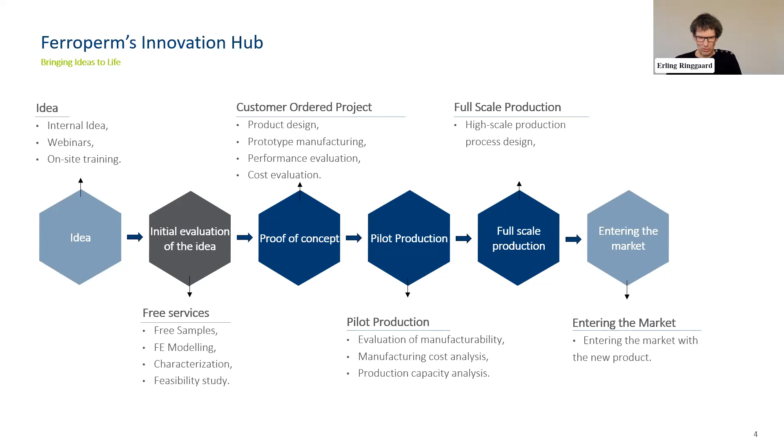Do you mind to share my screen? Yes, I'll just. So I think I will stop sharing now. Yeah. So, and I think you can.

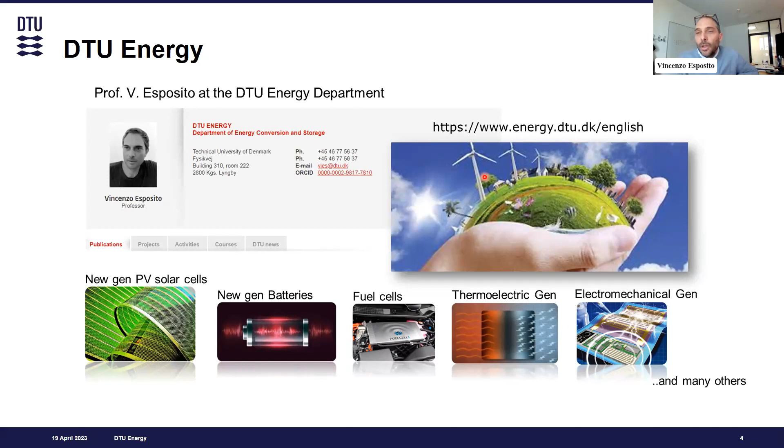This is especially related to the first part of my presentation, which is about a new class of electromechanical active material that are oxygen-defective oxides. In this part, I will show you how these materials that have been used for many years as ionic conductors have actually very interesting electromechanical properties at room temperature.

In the second part, I will give you a little bit of seminal work that we have been conducting in the last years to make some new electromechanical systems in the macro scale. And especially our focus is on additive manufacturing of ferroelectrics and piezoelectrics more in general.

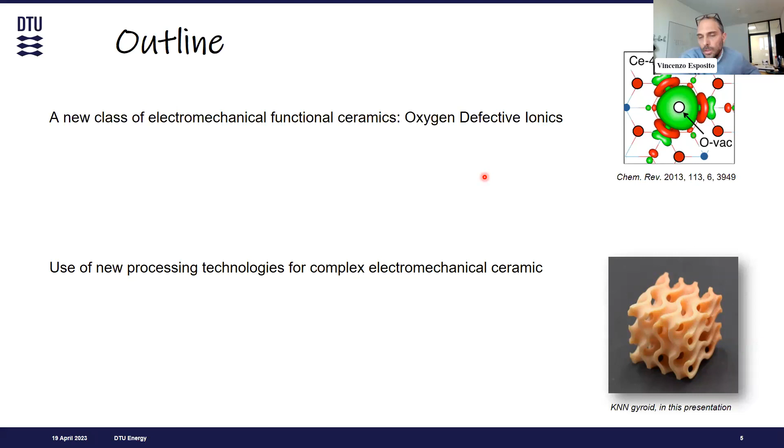So let's start with the first part, which is about oxygen-defective metal oxides. These materials are metal oxides, so ceramics, and they are centrosymmetric. So first of all, we break the first law of piezoelectricity. So we don't expect to have any or very small electromechanical activity out of this. But they have a very special feature. They are missing some of the very important constitutive part, which is the oxygen part.

So somehow, if you think of a material as a structure that has several structural components, we are missing one of the pillars locally, of course, and this is creating in the material some kind of effects that can activate and trigger electromechanical response. This has been shown not by us, but some time ago already in 2012 by Professor Lubomirsky from the Weizmann Institute of Science.

And he has demonstrated this principle in cerium oxide, which is one of the defective materials with a fluorite symmetry, and where in a thin film shape under a pretty low electrical signal, you can actually have some actuation, very important actuation, actually pretty large.

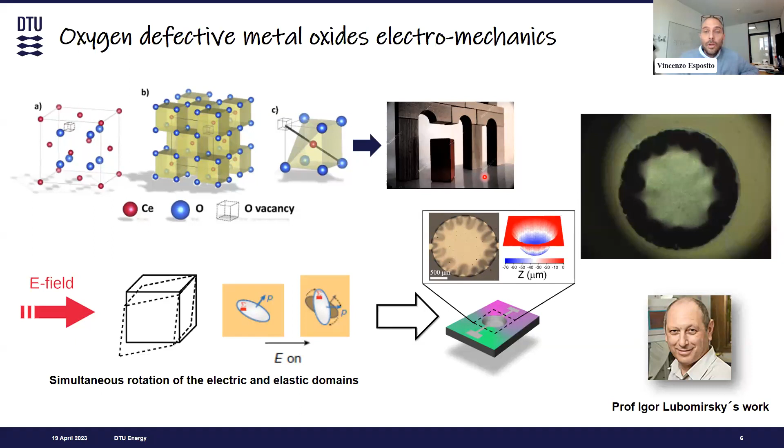So again, we knew these materials as oxygen ion conductors, and this is where they have been applied for sensors and fuel cells and electrolysis at high temperature. This is because those defects at high temperature are actually mobile, and we can transport oxygen vacancies through the structure just applying an electric field.

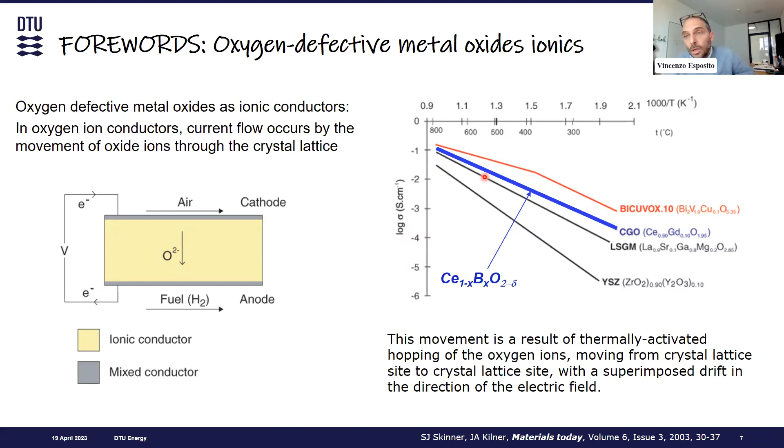If you look a little closer at the structural level, you will see that the oxygen ion transport occurs because there is some exchange in the site position of the oxygen vacancies. And this can happen through different paths, with different activation energy. But the most important condition is that we have enough thermal energy to activate this process.

So together with the application of electric field, we can move these vacancies, or if you look at it from the other side, we can move oxygen from its position to the vacancy place. So we have this transport effect at high temperature. And of course, this transport effect depends on many things.

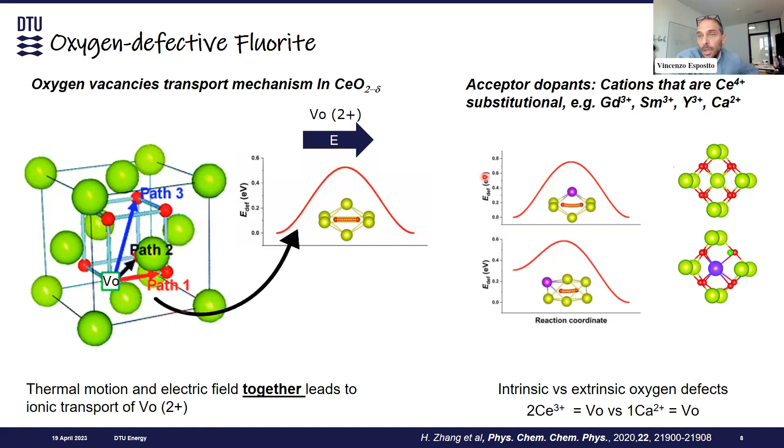And one of the important parameters that we are considering is the local distortion, for example, which is due to the dopants that we are using in the material. The dopants here are usually elements that have a lower valency, so they actually can induce formation of vacancies, but at the same time, they induce some electrostatic distortion of the lattice. And this can change the ionic conductivity.

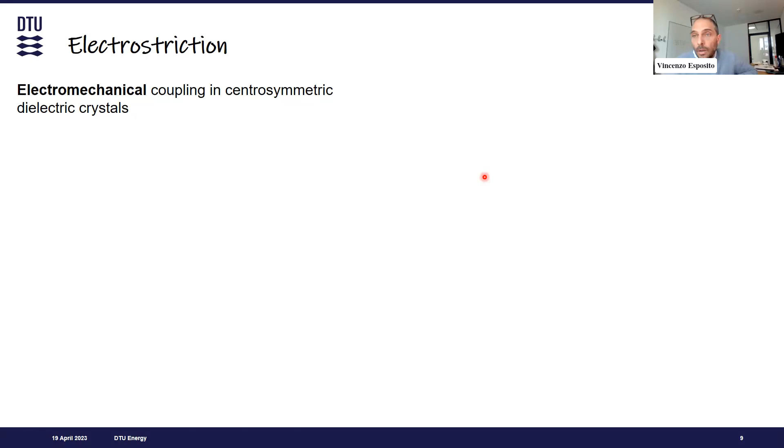So if we want to go back to our defective metal oxides as electromechanical functional materials, we will see that they have a response which is typical of electrostrictors. And here I want to open a very tiny parenthesis on what is electrostriction. Electrostriction is a common phenomenon for all insulating materials that under an electric field basically give a separation of charges. This separation, of course, leads to actuation or change of shape or strain in the lattice.

So we have here already a difference between electrostriction in centrosymmetric material and electrostriction in piezoelectrics. In this case, it is just actuation. So we give an electrical signal, and what we get out in the material is a strain. We cannot, unfortunately, get the other function typical of piezoelectrics, so the direct piezoelectric properties, where applying a strain, we get some electrical current.

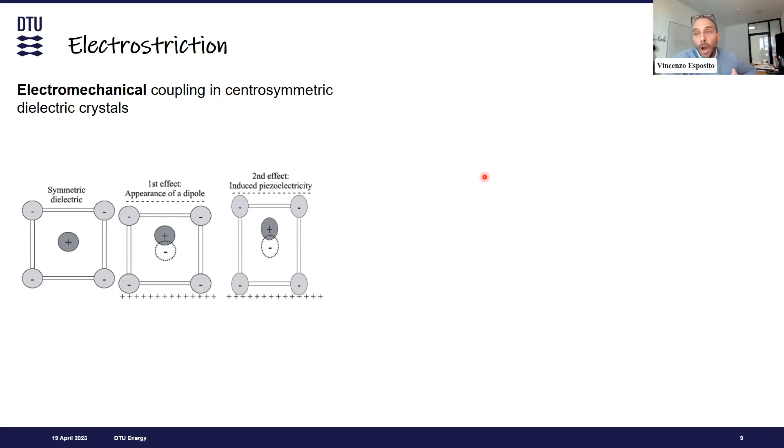However, the electrostriction itself is pretty large. Another difference with piezoelectricity is that electrostriction goes with the quadratic law. That means that it follows this parabola, and the signal is always positive, exactly because it's a quadratic law.

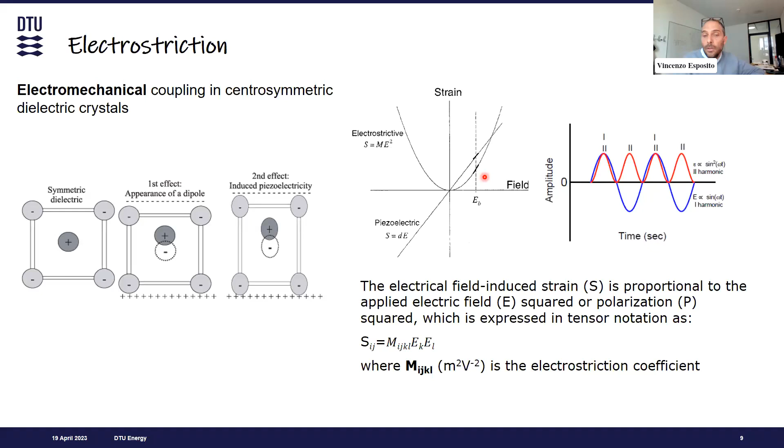And there are, of course, some equations that describe this effect. These are schematically represented in this slide. So, electrostrictors are very interesting materials, electromechanically active materials, because they give a very nice, precise actuation. They don't depole, they have nice features, and they can usually withstand very high electric fields.

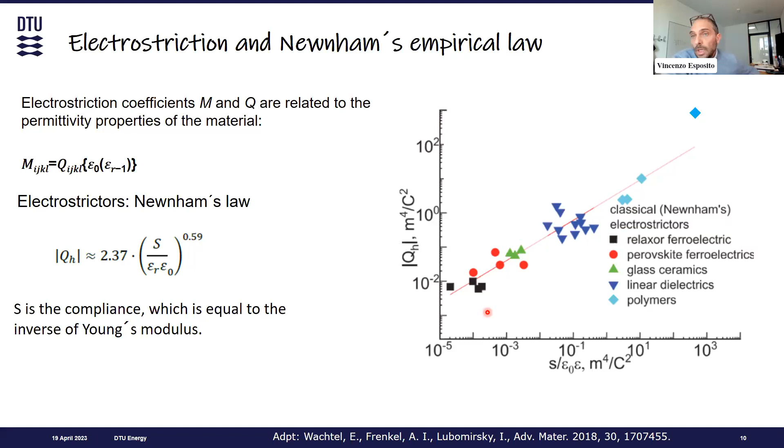But in general terms, their properties are strictly dependent on the dielectric properties. And this has been studied a few years ago by Newnham, who formulated an empirical law that says that the electrostriction coefficient is linear to the inverse of the dielectric properties along this line that you see in this plot. We can define such commonly known materials as classic electrostrictors, because they follow this law.

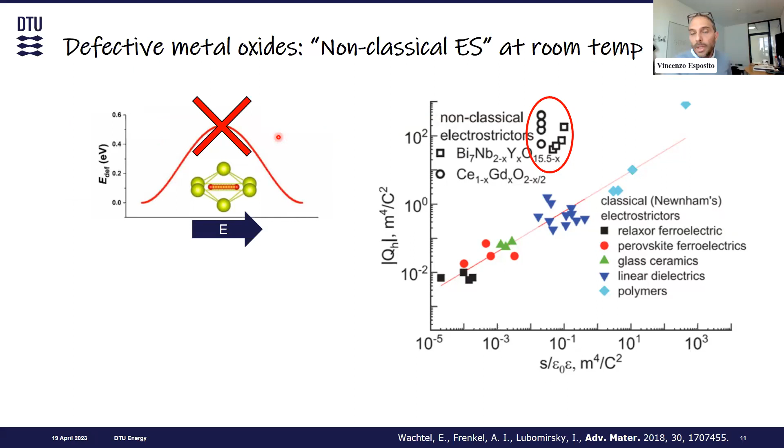We have a fluorite structure with oxygen vacancies. So our crystal is not perfect. It is missing an important component. And if we have a strong electric field at high temperature, we usually move this defect. But now we cannot move it because we are in room temperature conditions. There is not enough thermal energy to do this job. And the result is that when we apply an electric field, the material starts to strain. And the strain goes back depending on the intensity of the electric field.

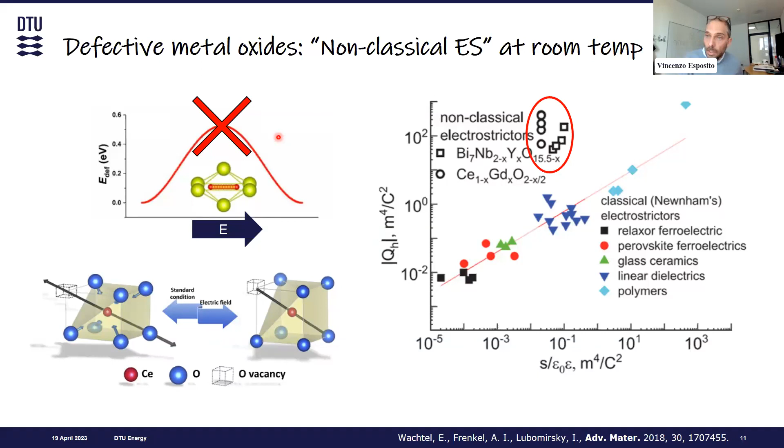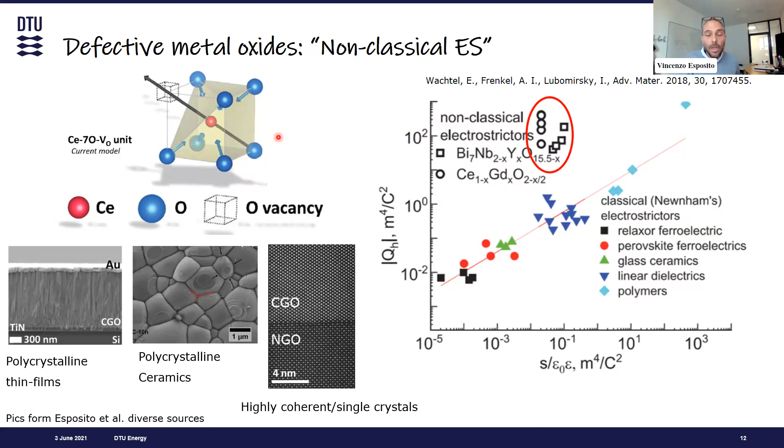What is also nice about this material is that this works in any possible ceramic configuration. So we go from polycrystalline to single oriented films, polycrystalline films. We still find this effect. And this is, I think, pretty important because only piezoelectrics and ferroelectrics have these properties after poling, right? And in ceramics, it is a pretty rare and precious property.

So the first question that we have when it comes to a polycrystalline system, which is a bulk ceramic material, is what is the effect of the disorder, so the grain boundary or the grain size. And we've been analyzing the electromechanical properties for several years. And you can see in these plots that the grain boundary, the grain size, is actually affecting the electromechanical response, but especially at low frequency.

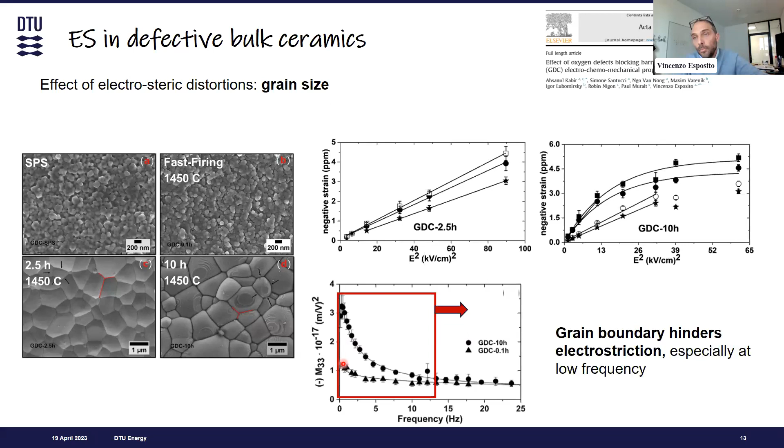So if you see here in these plots, we have this linear relation between the square of the electric field and the strain, which is typical of electrostrictors; there are also some not completely explained saturation effects. But what is actually important to notice here is that the electromechanical response changes as a function of the frequency. So the first thing is that depending on the configuration of the vacancies, we can actually modulate the electromechanical response.

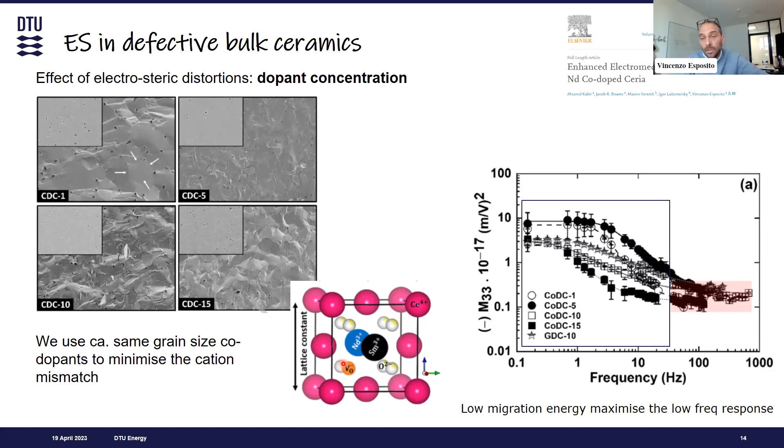So we were trying to understand this effect, not only in terms of grain boundary, but also more in general in terms of electro-steric distortion of the lattice, for example, using different dopants. And the starting point was to use a dopant or a combination of dopants that do not lead to any distortion of the lattice. And we have noticed that this configuration is the best in terms of electromechanical response, especially at low frequencies. On the other hand, when we start changing the size and the valence of these dopants, we also change the electromechanical response at different frequencies.

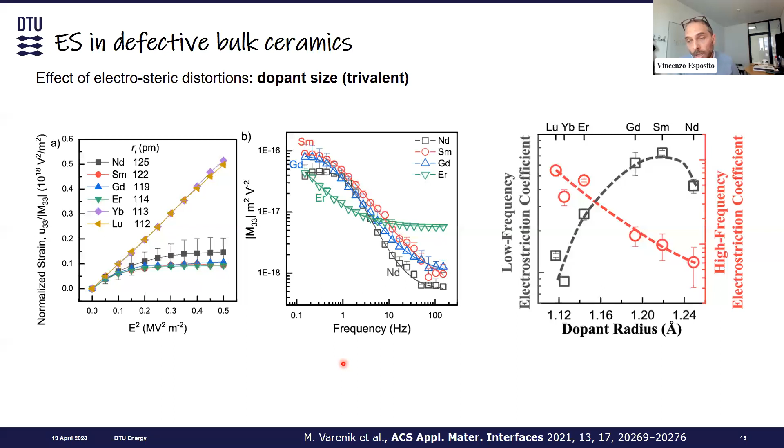So since there are many possible different dopants and many possible different combinations of dopants, we need to do some simulations with DFT models. So we have to take the atomistic picture of these materials and start putting, artificially and numerically, different cations in the cerium oxide lattice. And this is actually interesting because it gives us a hint of what can happen.

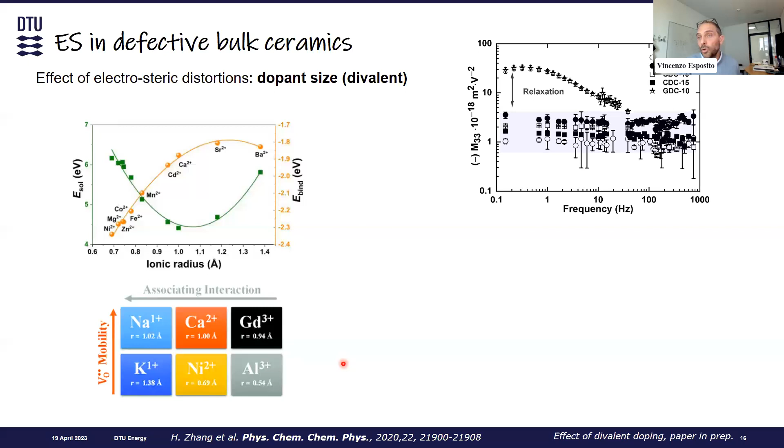For example, if instead of using a 3+ acceptor dopant, we use a 2+ acceptor dopant. And what we recently discovered is that, for example, calcium, magnesium and strontium completely suppress the low frequency response. So this is also a very important indication for us of how these materials are working.

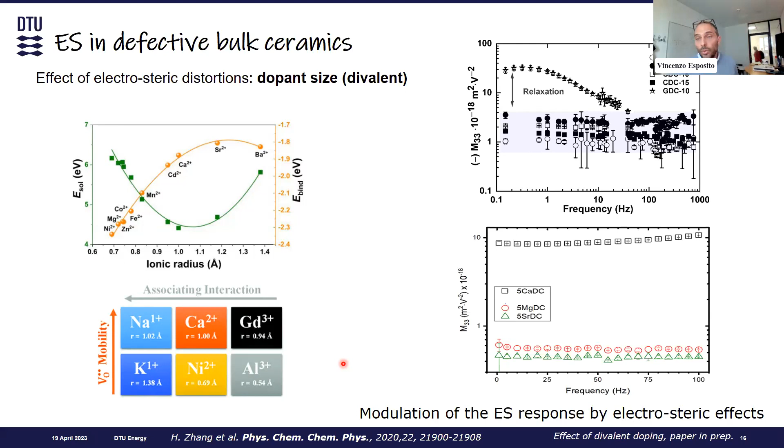So that, on the other hand, it's also possible to manipulate the response, to have a material that has maybe a steady response in a different range of frequencies.

Other important options are using isovalent dopants that can be tuned depending on the processing technology that you are using. And this is the case, for example, of praseodymium-doped ceria, which is actually a pretty good electronic conductor at high temperature. It's not that good at low temperature, but we see that when we use reducing conditions, so when we have a large population of 3+ praseodymium, we can get a very high electrostriction in a wide range of frequencies. And this is also very nice.

So far, I've been discussing just experimental results. It's a phenomenological approach. I can also extend this to the thin film part, because thin films are extremely important, especially when we go to miniaturization and deposition on silicon and other substrates for microelectronics. Because the current state of the art is based on piezoelectric and ferroelectric materials that sometimes are very difficult to process, while our cerium oxide, our oxygen-defective oxide, is straightforward.

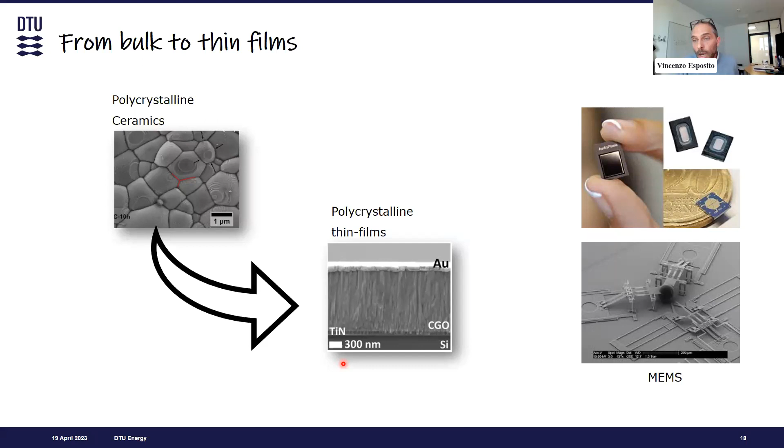I have an example here where using some ceramic electrodes, for example titanium nitride, we can have a direct deposition of a material that gets very stable. And the stability of the ceramic electrode is actually pretty important, and even superior to other metal electrodes that can be used in this technology. In this paper, for example, we show that gold is less mechanically stable than titanium nitride, and we get pretty interesting properties.

Something else is the deposition at low temperature, because the crystallinity now becomes not that important. I don't know if you remember the first part about the grain size. We can still keep electrostriction even though we have small grains. And so using low deposition temperature, for example on glass, we can have a nice electrostrictor, and this is demonstrated here with a cantilever that can resonate at different frequencies.

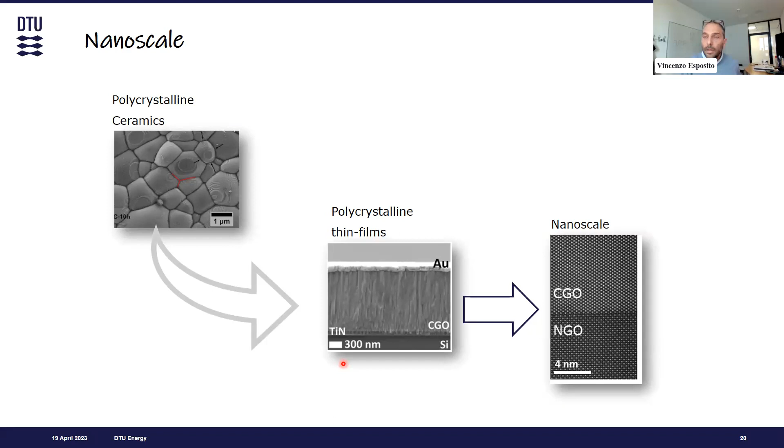And what is nice about this part of the work is that the resonant frequencies are confirmed by COMSOL simulation. So this is again all phenomenological, talking about experiments and results, but there are also some other considerations that we can do more at the theoretical level if we downscale our system to the nanoscale. And I think things get very interesting here.

However, we still need to produce some samples, and to do that, we go away from classic processing technology for PVD or CVD, and we go for a PVD technology that allows us to control with great precision the crystal, the composition of the crystal, and especially the orientation of the crystal. We are specialized here in using pulsed laser deposition for thin films. And this allows us to create a very nice interface with substrates, which are single crystals. In this case, for example, we have a neodymium gallate single crystal with the cerium oxide deposition.

What is nice in this case is that we have basically a single crystal deposition on a single crystal substrate, which has no electromechanical activity whatsoever. And when we tune the deposition using different crystals with different orientations and different lattice parameters, we can actually control the lattice strain at the nanometric level. So we are basically taking our fluorite structure in a strain condition, which is imposed by the substrate.

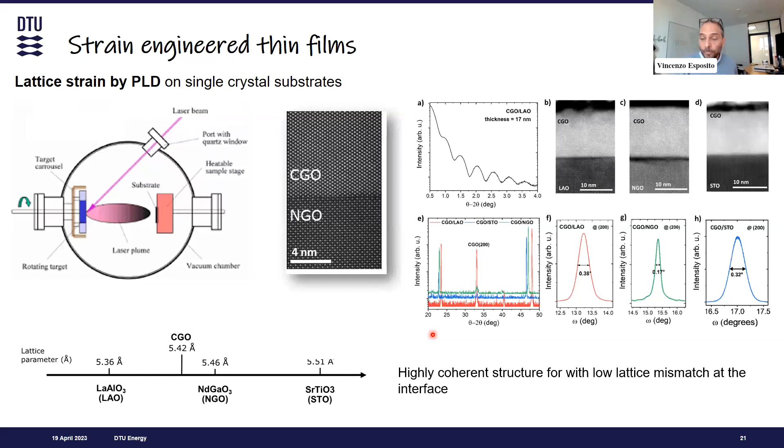And this is what I will show you in a minute when we deposit the CGO on different substrates, like, for example, lanthanum aluminate or neodymium gallate or strontium titanate. They have a different lattice parameter, and the crystal grows with a different tension, with different strain at the lattice level. This is not the only possibility.

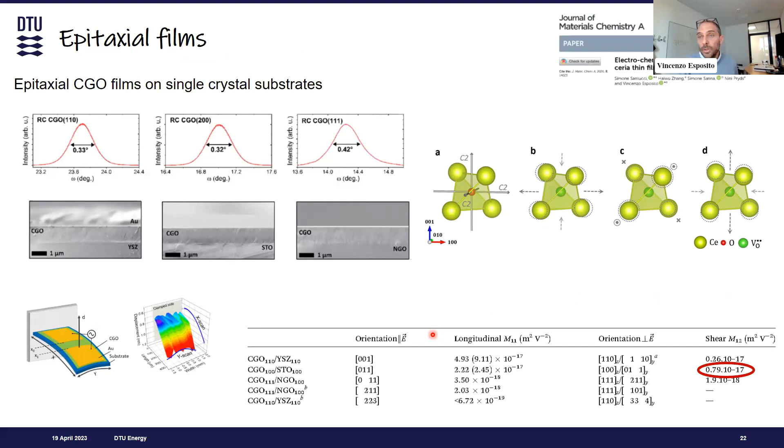But going back to the strain, of course, we can make a direct comparison between what happens in completely strained films and in relaxed films. And this can be done pretty easily, just by tuning the thickness of the film. So when we make thin films that are below 20 nanometers, there is a pretty high strain coming from the substrate.

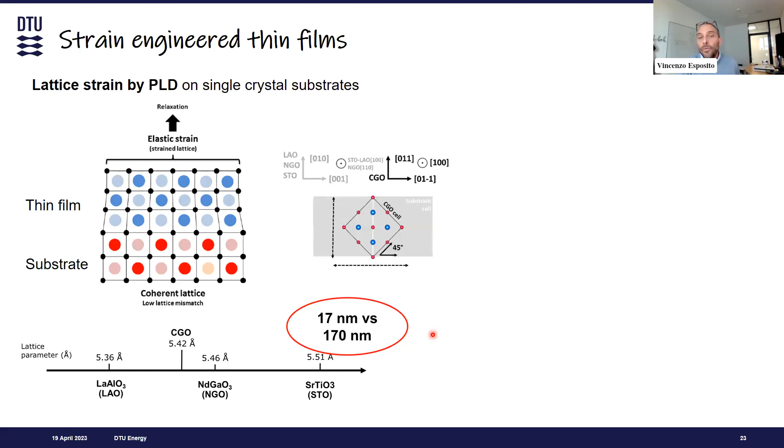It's not uniform, but it can be averaged as more or less uniform in the whole thickness. However, when we go to thicker film, the effect of the substrate, so the interface between the film and the substrate, diminishes. And at the end, we get basically a fully relaxed system. So if we compare, for example, three films on three different substrates, which are thin and thick, we immediately see that the lattice in the thin film will change shape because of the influence of the substrate.

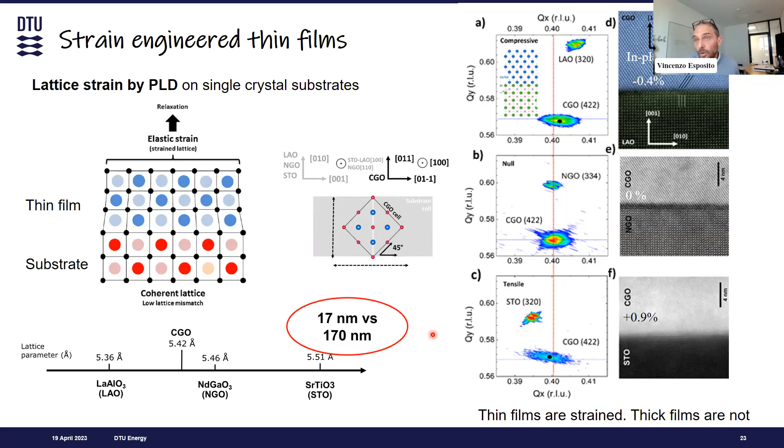And now we can actually tune the strain to be either compressive, tensile, or we can even choose a substrate which gives no strain at all. On the other hand, when we go for thick films, these are supposedly completely relaxed, and this is also what we see from our XRD, from our diffraction characterization. So let's go to

the results of this case, and what we notice is that if we do a cantilever like that, we get the second harmonic, which is typical of electrostriction. And then immediately we notice that the thick film and the thin film have similar properties when they are relaxed or in tensile strain. We're talking about in-plane tensile strain. However, in the case we have an in-plane compressive strain, the electromechanical response is much higher.

And we have done these experiments a few times, and we have also included other substrates, and the compressive strain is confirmed to give a much higher electrostriction in this cantilever configuration. It's basically gaining at least one or two orders of magnitude with respect to the polycrystalline system. And this is extremely impressive. So the conclusion is that in-plane compressive strain favors the electrostriction effect.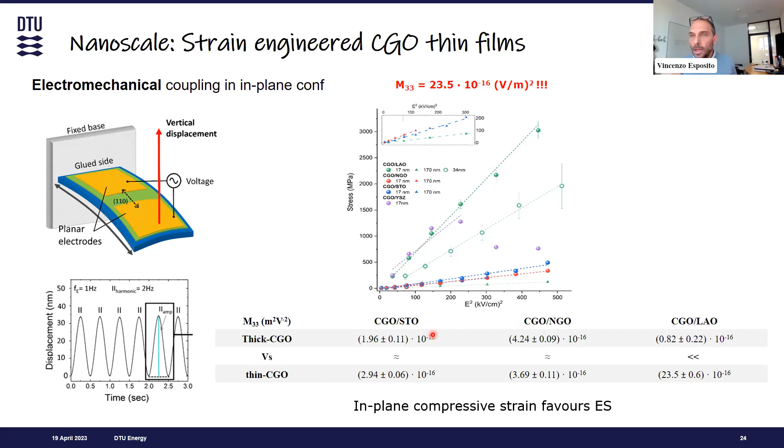So since we like this kind of approach, because it's not only giving interesting experimental results, but also defining some new possible mechanism in this material, we have decided to extend the effect of strain in a so-called multi-layer heterostructure. So in this case, we replicate the number of interfaces that we have between the substrate and the film in the film itself, using different materials that have a slightly different lattice parameter.

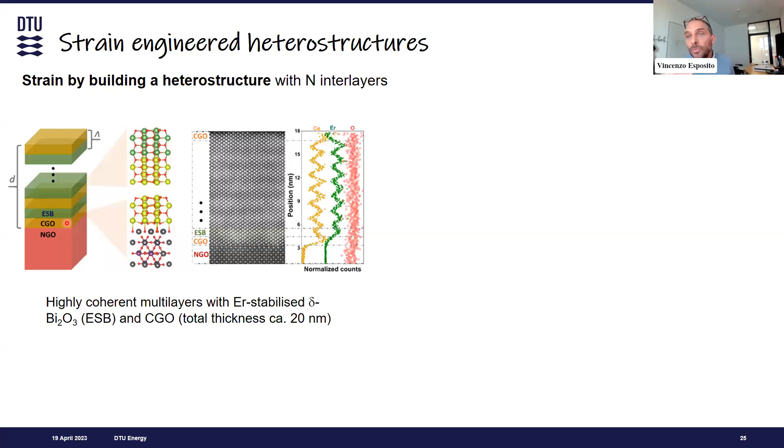And when we stack them together in a multi-layer system, we basically generate a compressive and rather uniform stress in the material that gives a strain to the film. And this is confirmed, of course, through XRD. And this is the kind of compressive strain that we get out-of-plane for this heterostructure, which is made of a bismuth oxide, another oxygen-defective fluorite, and gadolinium-doped ceria, our study case electrostrictor.

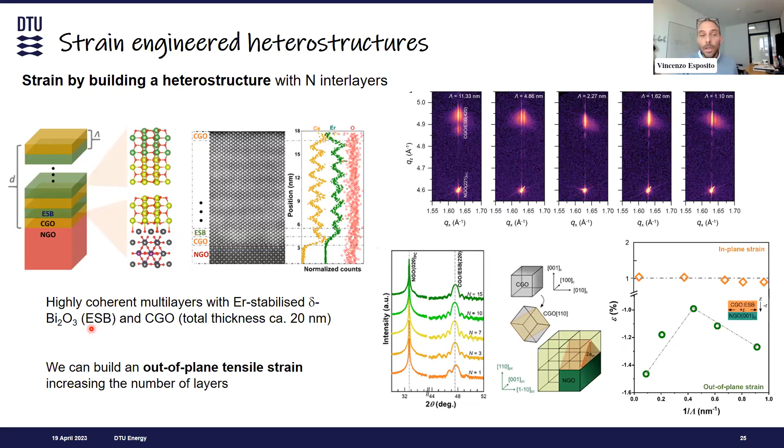Well, this configuration is extremely interesting. And what we notice immediately is that depending on the number of interfaces that we are putting in the system, we can increase electrostriction by orders of magnitude. So in this plot, you see our pristine CGO film, and this is the heterostructure. And you see that this follows a volcano type of behavior, reaching a maximum and then declining.

And this decline is actually due to the limit of this technology that does not allow us to go for too many interfaces, since they get very thin. They are around 1 nanometer. Then we start having some intermixing of elements. And this was also confirmed by chemical analysis, where we see that there is not much difference between the chemistry of one layer and another when we have too many interfaces and the films get too thin.

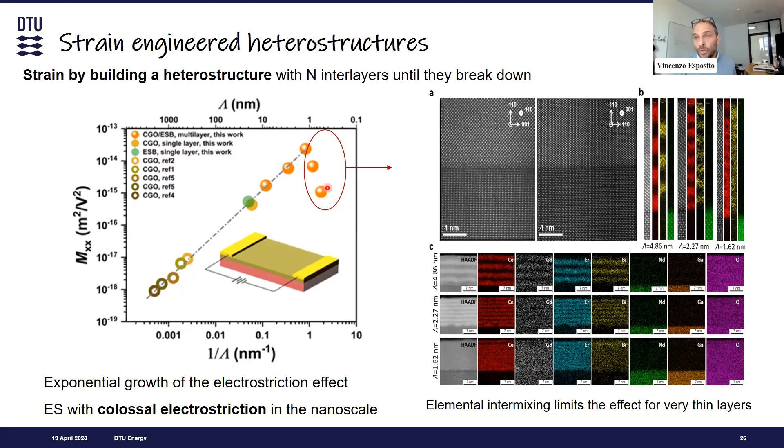So this picture gives you an idea how many orders of magnitude in the electrostriction coefficient we can get using this strategy. But I think what is interesting to notice here is that the electrostriction that we get in this material is much higher than anything ever measured among ceramic materials, and not only ceramics actually. You can maybe recognize here a few polymers and relaxor ferroelectrics, and even new materials that have been tested electromechanically just recently. These results are very interesting, and since they are so important, we could publish them in Nature.

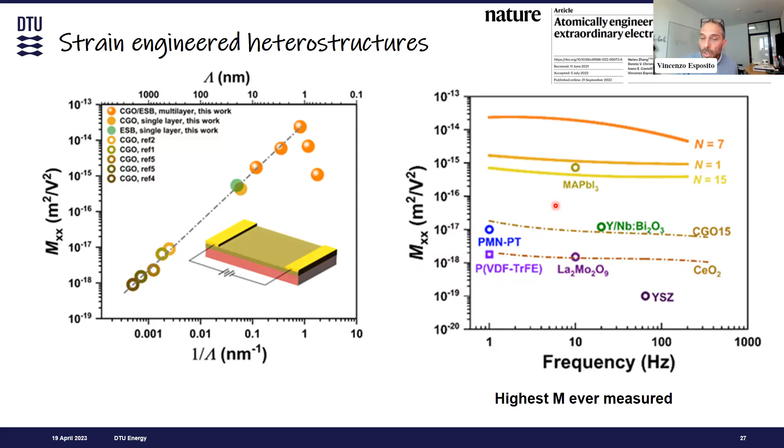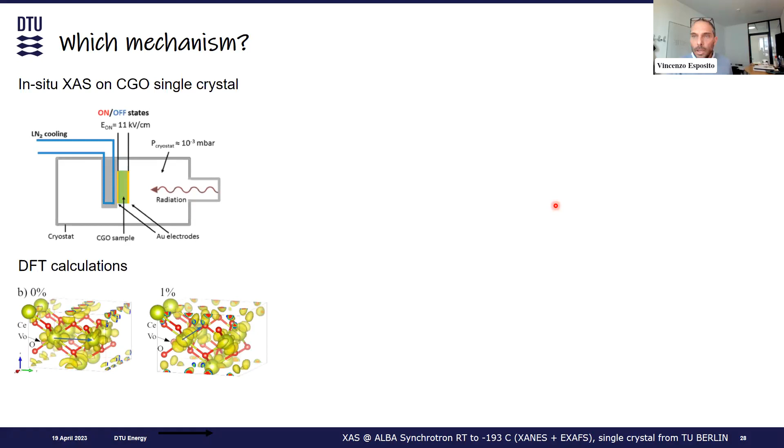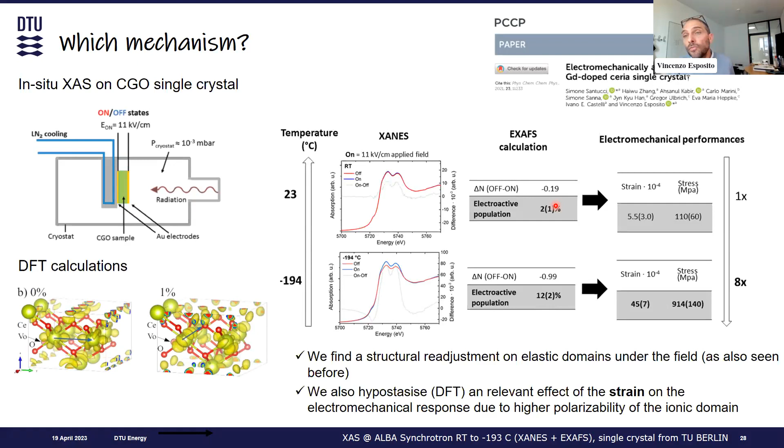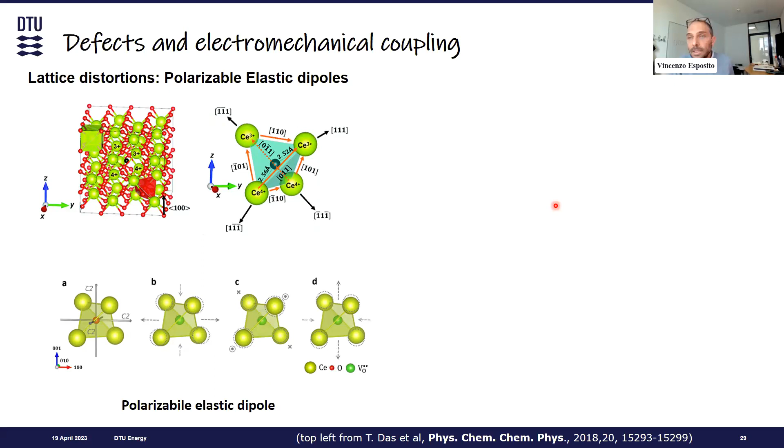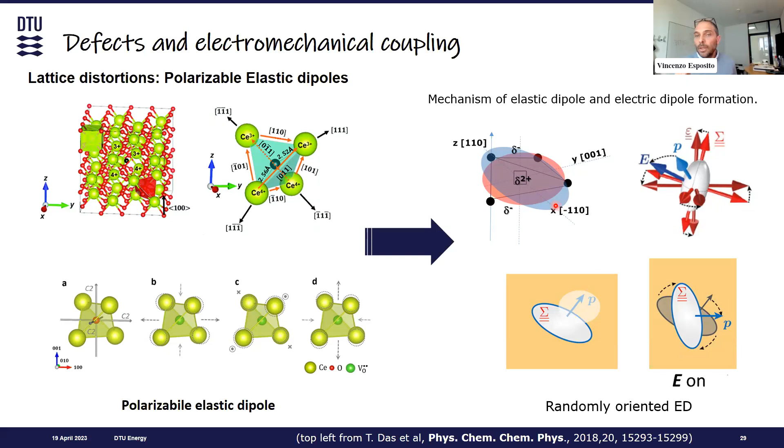This is basically a distortion, local distortion in the solid solution, and easy polarizability of the material. So when we apply an electric field, the charges around the defect can change direction and drag around the elastic dipole. We don't have time to go through this. I'm open to answer questions about this topic, but this is more or less the dominant model that we have in mind right now.

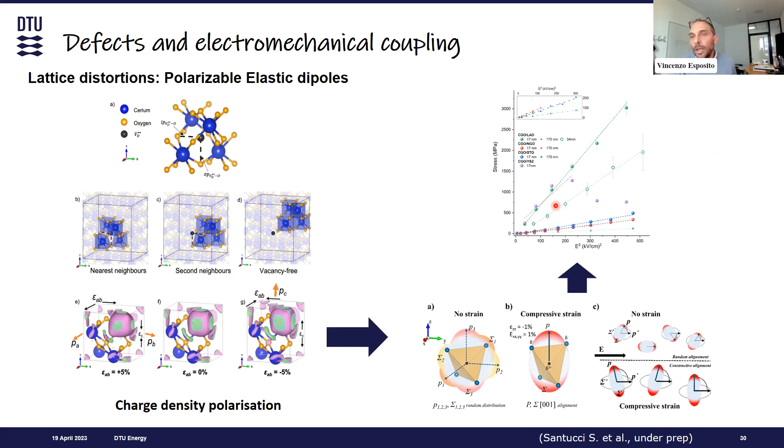And this seems to also confirm some of our results, especially those related to strain. And the DFT calculation tends to agree with this hypothesis. So a take-home message is also that as soon as we can get high distortion in the system, we can actually get a nice electromechanical response.

And this has been done in another publication in Science in collaboration with the EPFL group, where we show that if we can strain the material applying a DC signal and overlapping an AC signal on it, we can actually get some kind of linear response as typical of a piezoelectric material. This is nothing new. It is known that if you have a DC on a centrosymmetric system, you can actually get a linear response. This has been already formalized.

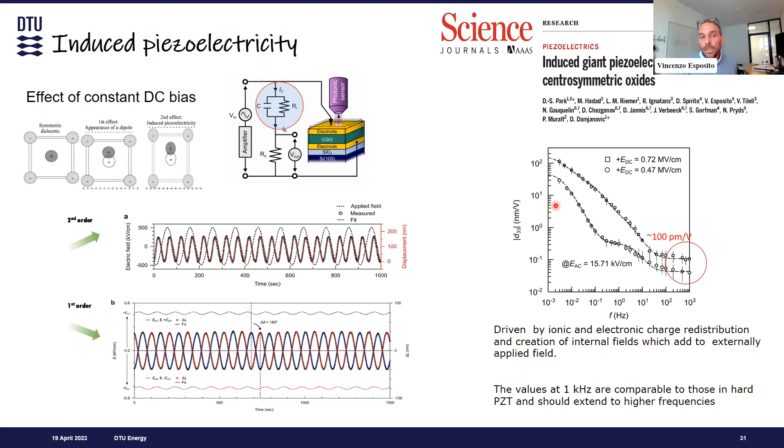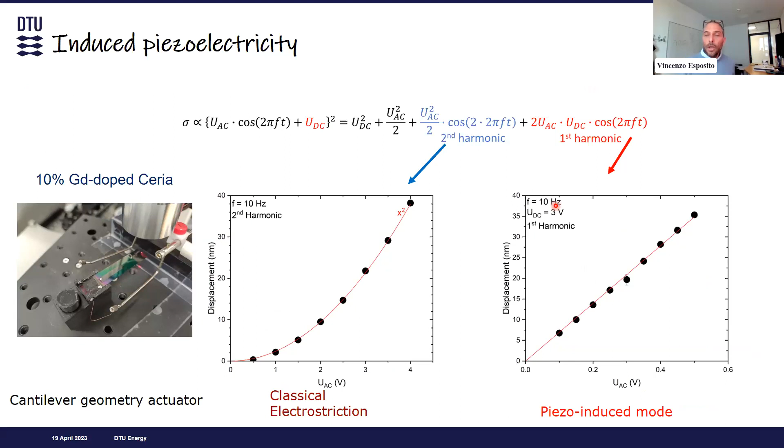But what is nice to see is that we can actually apply this effect, and it is pretty large, especially at low frequency. So with this, I conclude the part that oxygen-defective metal oxides have electromechanical properties that are ubiquitous. We find it in polycrystalline, in single crystal, in the columnar structure, and basically at any scale. And the nice part is that there is still room for manipulation and improvement. And we hope to see these materials in action in real life very soon.

I have concluded my first part, so if you have questions, please let me know. Thank you very much, Vincenzo. Maybe while the audience is thinking of their questions, I can ask just one.

To begin with, these materials are generally coming from the field of ionic conductors. So how does it look in terms of electronic conduction? Is that an issue, or are they really good insulators in terms of electronic conduction? Can you say something general about that? Yes, I can say in general about that.

The materials we are analyzing are usually pure ionic conductors, especially in high oxygen content. Electronic conductivity in these materials is a possibility. It can arise in reducing conditions at high temperatures. So in the presence of oxygen at high temperature, they are pure ionic conductors. In reducing conditions, they can become mixed ionic and electronic conductors. But this is again for high temperature application, where the thermodynamics are completely different, and there is a pretty dynamic exchange of oxygen gas with the ceramic itself.

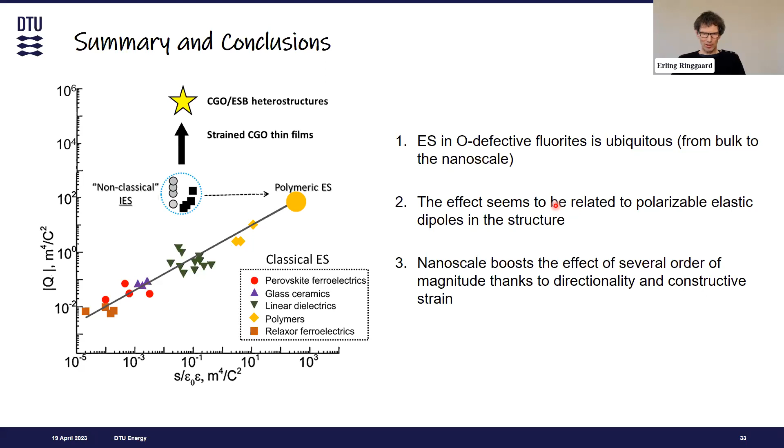Okay, thank you very much. So I think with this little break, we will continue with part 2. Yes. Actually, I'm very glad.

This is a little bit more relaxing for me because it is a much less scientific topic in the conventional terms, and there is less materials and structures. Let's say it's more application-wise. I like this topic very much. I've been trying to drag this into the framework of DTU Energy for some time, together with other colleagues, of course, not by myself. And I want to show you a few things that are related to the manufacturing of materials in general, of ceramics in general, not necessarily electrostrictors, but also piezoceramics and ferroelectrics.

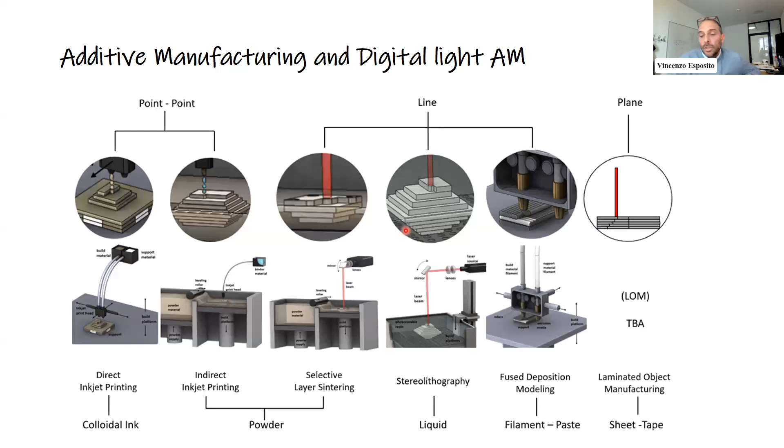So, of course, when you talk about additive manufacturing, there are many different technologies that we can use. Today we are covering some of them, but today I'm especially talking about stereolithography-based, so basically digital light technologies. Even in this niche, there are different technical solutions to use light to process materials. But what is common for all these technologies is that we basically exploit the lithography principle.

So we have photopolymers that, when they are irradiated with certain light, polymerize. And we can drive the light in many different ways. There are some examples here in this slide, but it is important that we have a photopolymer system that can solidify under the light. And we have several examples.

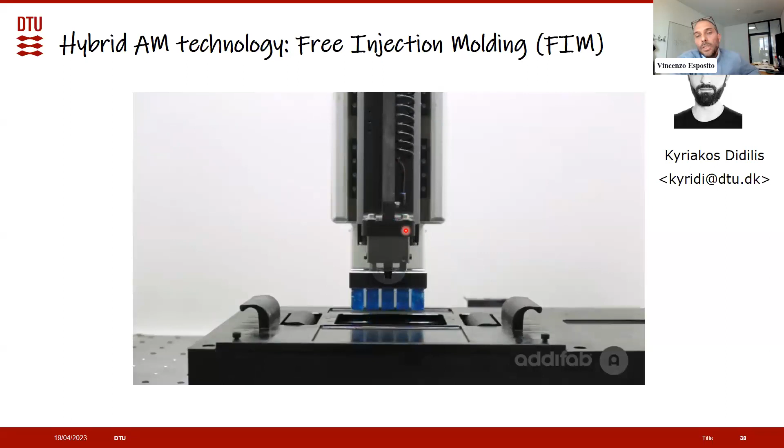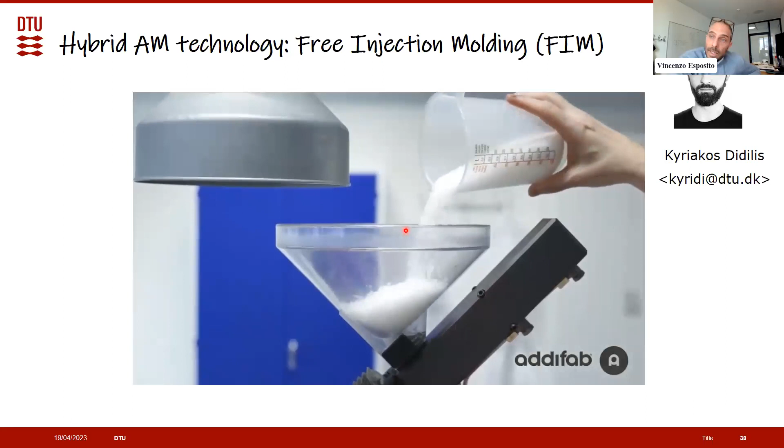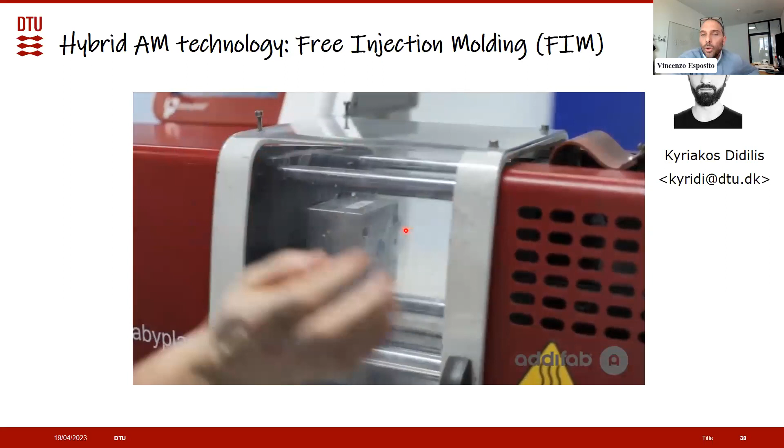This technique is extremely versatile and allows us to print many different kinds of ceramics. But we need to start from polymers plus ceramics. Another option that we have been exploring in collaboration with a Danish company called Addifab is to use the precision and the nice resolution of the polymer printing to make molds. We make the template, as you see in this video, and then we use a conventional feedstock material, a thermoplastic together with a ceramic, and we do conventional injection molding. By that I mean we use the injection molding principle, but with a special mold.

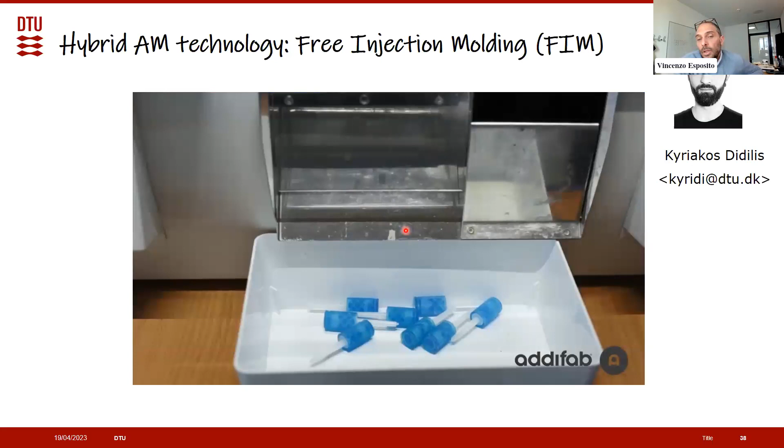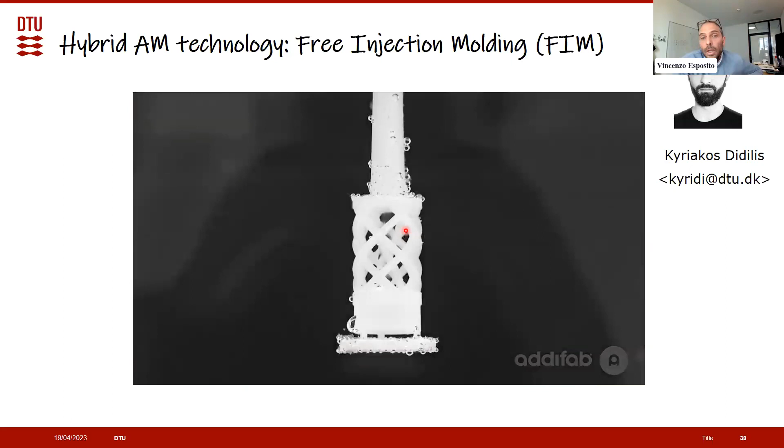This mold is made by 3D printing, and this allows us to produce some shapes. You can see in this video that we have injected the material, and now this is the magic of this technology owned by Addifab. We can dissolve the mold and get back the green that is ready to be debinded and sintered. This technology is apparently simple, but has a very wide range of freedom when it comes to shapes. And we can print many different materials using just conventional feedstocks. There are commercial feedstocks basically everywhere with different ceramics, and we get freedom in terms of shapes as well.

Something else is that when we sinter, we have a change of shape which is not strictly related to the layer-to-layer deposition, which we have with other processing methods for ceramics where we directly manufacture the ceramics. This gives a nice example of how the distortion can be controlled easily. And not only that, we can actually use whatever we know about injection molding to optimize our printing.

And again, the flow in the mold can be controlled, and we don't have the layer-to-layer deposition or even the drop-to-drop deposition we usually have with other printing technologies.

So I give you, for example, this barium titanate printing, where we show that just changing a few details in our mold can prevent the formation of cracks and other defects that are generated during the sintering, for example, where the stress can get so high and break the material. The finish of the pieces is decent and can of course be improved. We have some examples, but in the end what we get is always a nice and dense piece.

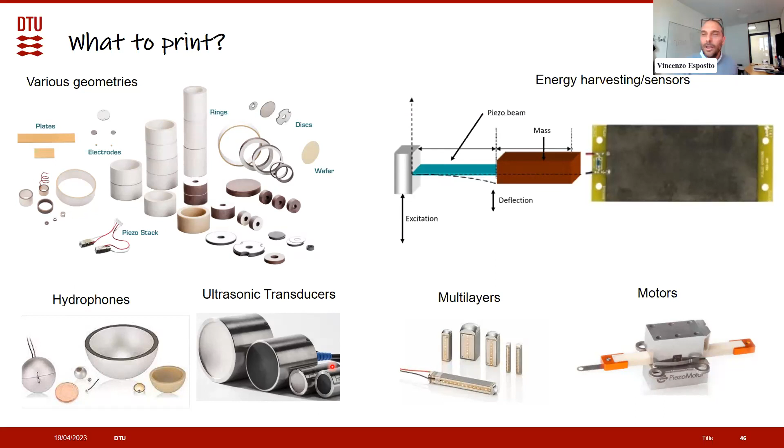But we, as innovators, don't care about this, to be completely honest. I think if we have a very powerful tool like this, we should go for new designs. And my personal opinion is that this electromechanical application field has been constrained by shape for a long time. So, as a scientist, my first interest was to look into metamaterials.

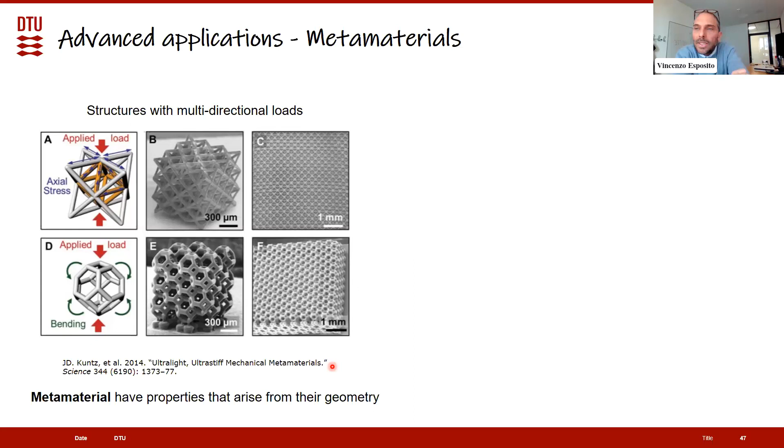Metamaterials are materials that have properties that arise from the geometry, and they go beyond the properties of the material itself. This is, of course, very well known for mechanical systems and optical systems, but these systems are, let's say, passive. They don't have intrinsic properties. We start seeing a few changes in the literature when it comes to metamaterials with active components, especially with piezoelectrics, for energy harvesting, or composites.

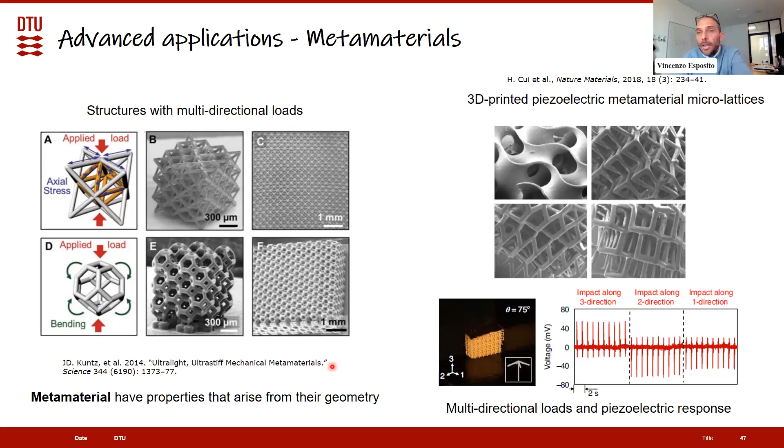This Nature Materials paper is an example of polymers loaded with piezoelectric powders that can be used for energy harvesting. And we have tried that. We have tried to make superlattices with our freeform injection molding, and this is one of the results.

But the awful truth is that when you want to test these materials, for example for actuation, where you want to see what happens when you apply electric fields, you are in this very uncomfortable position where you don't know where to put electrodes and which electric field to apply, because they are so resistive that it is really impossible to go through. So if you have an electrode-free application in mind, these lattices are interesting. If not, it gets a bit complicated to place electrodes in the right place.

You mentioned two main technologies of additive manufacturing: digital light projection and freeform injection molding. Could you say something about the geometry limitations, and the advantages and disadvantages of the two techniques?

Yes, of course. I think they are pretty complementary. The lithographic printing of slurries including ceramic particles is a beautiful, amazing technology that allows very high resolution and high quality pieces. If you are looking for individual complex geometries, this is probably the best possible way to go. This is also where we have the nicest features in terms of resolution.

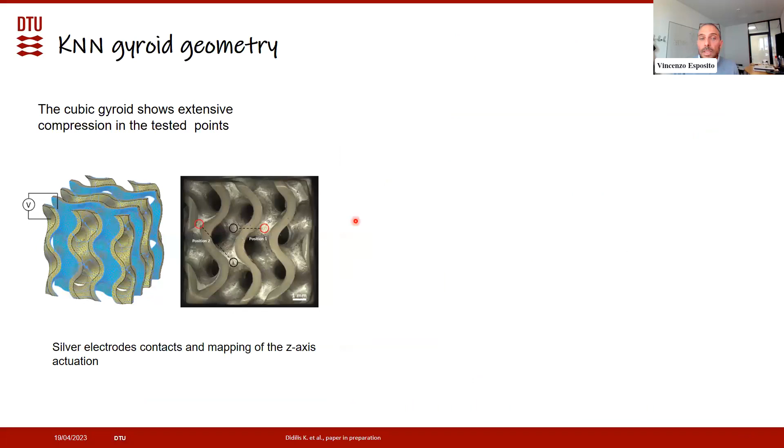What is also nice of this technology is that it can go multi-material. So you saw that we have this double bath system here, so you can produce layer by layer different materials with different composition, because you use different baths. So we go for composition A, then we print on composition B, and then we build layer by layer the multi-materials. There are other technologies also based on stereolithography that can go multi-material in the 3 dimensions.

So this is more or less limited to the 2D because we have to build up layer by layer, but other technologies can also go with a certain complexity and an easier complexity in the 3 dimensions. So what I mean is that the 2 materials here are built layer by layer. So you have to go with many steps. Others can go a little faster.

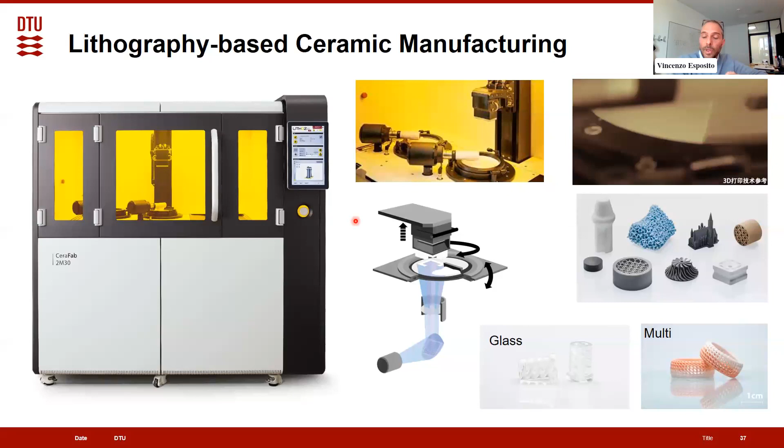When it comes to the hybrid technology, I think this is extremely powerful, especially if you consider that you want to have a production that is faster and based on easy processable materials. Feedstocks are well known, are based on thermoplastics, and I think there is a big potential in this field. And when it comes to the resolution, I think it's a nice hybridization here, because you can have also nice features and details when you print your mold. So now you transfer your geometrical features from the piece itself to its mold. So there are, I think, interesting applications also in this case.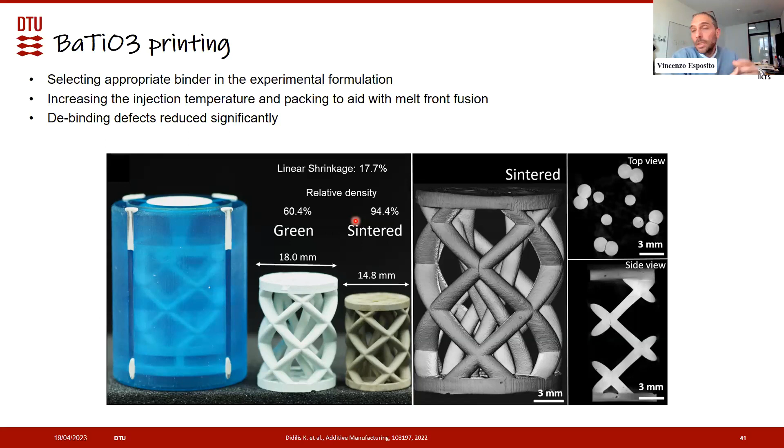The printer we are using right now is the one that we're using as a pilot and has a certain limitation in terms of resolution. I gave you a few examples here, but there are printers that can do much better with the polymeric mold, and they get much better refinement. And I think this is part of the strategy of Addifab. I think they have already in line this kind of technologies. Yeah, thank you very much.

We have a handful of questions. The first one is about the, let's say, commercial outlook. Do you think that 3D printing will be suitable for large-scale production, considering the complexity of the post-processing, like binder burnout and electrode printing and so on? Well, I think that especially when you look at the hybrid technology, injection molding, there won't be much difference. I'm not an expert in terms of commercialization. I'm not the right person to answer this question. But from outside, I can say that I don't think there are different issues than processing that you have with tape casting or extrusion ceramics.

You know, you are still in the field of composites, where you have to burn out the polymers and control the shape after sintering. So on that side, I don't see big differences. And I think injection molding is a good example where you can actually get into the mainstream of ceramic processing. Maybe it cannot cover everything. There are other technologies more suitable for finer pieces with high resolution, like the Lithoz technology, or the 3DCeram technology. But there is a good complementary field here.

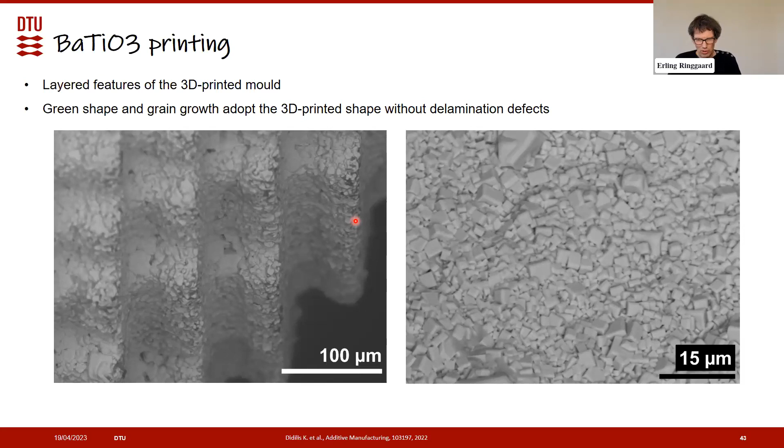Yes. Okay. The poling is straightforward in case of the gyroid. We pole it exactly how you would pole a pellet. You have 2 electrodes. The only difference is the pellet has 2 parallel electrodes. Here they are very articulated, but still what you have in between is going to be poled, right?

In the one direction. When it comes to these other guys, this is a completely different story. The poling is a very complicated process. It requires too high an electric field. You need to go for other technologies that are not disclosed.

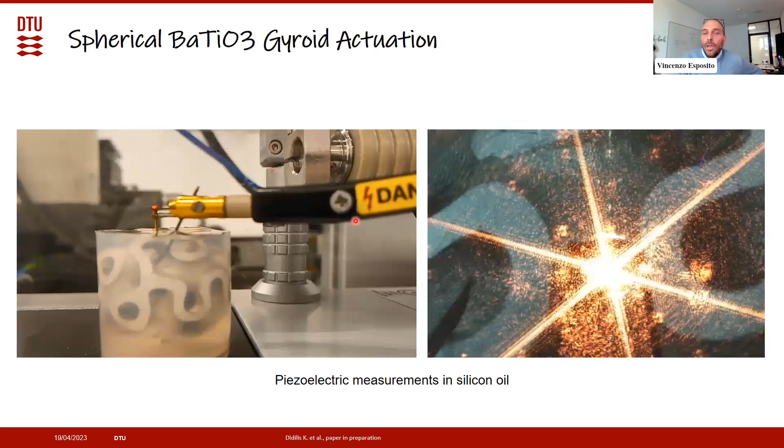There was a question about the mold for free-form injection molding. What material? This is a proprietary technology of Addifab. They use a polymer that can be dissolved in a special mixture, and it will leave your piece free from the mold. So this is an example, but in other cases you don't even need to remove the mold, because maybe you can simply open it. For example, for the lens, we can open the mold without dissolving it.

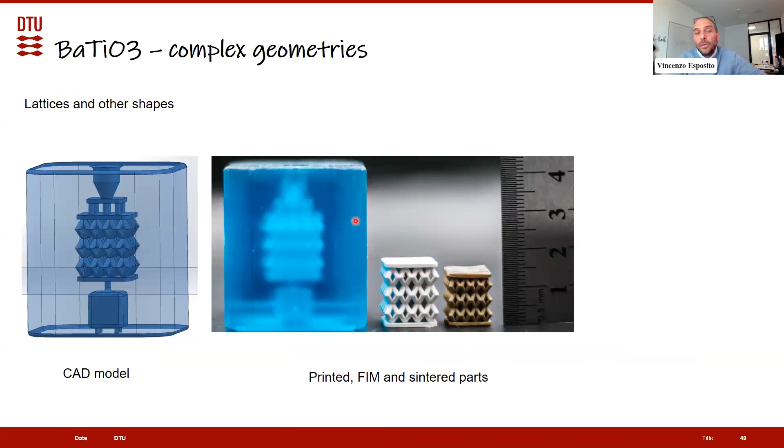But for more complicated shapes, this is the case of this lens. I think I have it here. No, I don't have it.

Okay, I think let's just jump to the next question. I'll start with the second part. He's saying thank you for a very nice presentation. But then the question is, besides being beautiful, what is the purpose of these complex structures? Or the other way around, can you formulate a shape for a required function? I'm not sure I understood the question. You say it is a beautiful shape, but what is the function? Yeah, exactly. So what is the purpose of this very beautiful and complex structure?

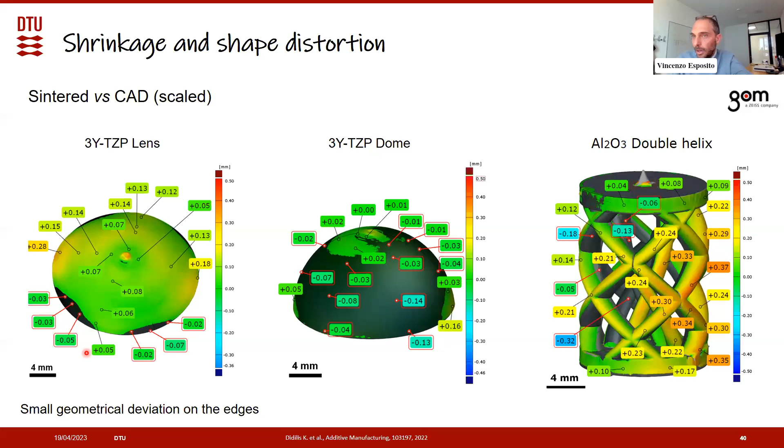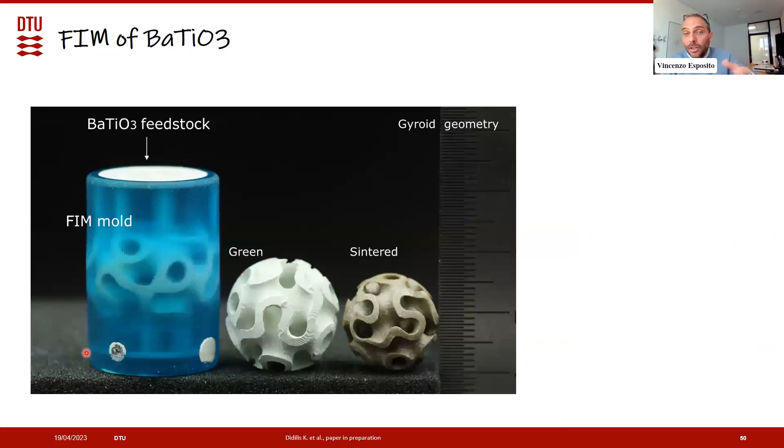I'm not sure I am in the position to say what is the purpose. I mean, some of these shapes are for focusing mechanical waves and so on and so forth. If you are specific, these have no purpose when it comes to piezoelectrics, for example. This is just a showcase. But when it comes to the gyroids, I hope I showed you today that we can have some kind of amplification of the mechanical effect on large volumes, as we usually do with multi-layer systems.

So what we do, we put things together. We even couple the piezoelectric materials with mechanical springs and cymbals and other things that can amplify the strain. What I'm showing here is that our gyroids can do the job without external components. So let's say that we can use this as an actuator, for example, to actuate a motor or whatever. So this is the suggestion that I'm giving today.

And maybe just briefly, the last part is, are you actually able to formulate a shape for a required function? Maybe a difficult question, but I think it is possible, and it depends also on the application you have in mind. I'm not in a position to say too much about this, but I think this is a good example, a first step towards something different that we can do with these materials.